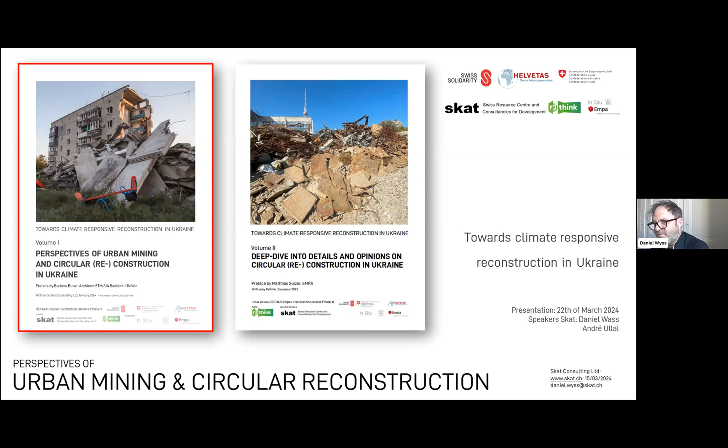While our part shows more the perspective of urban mining and circular construction.

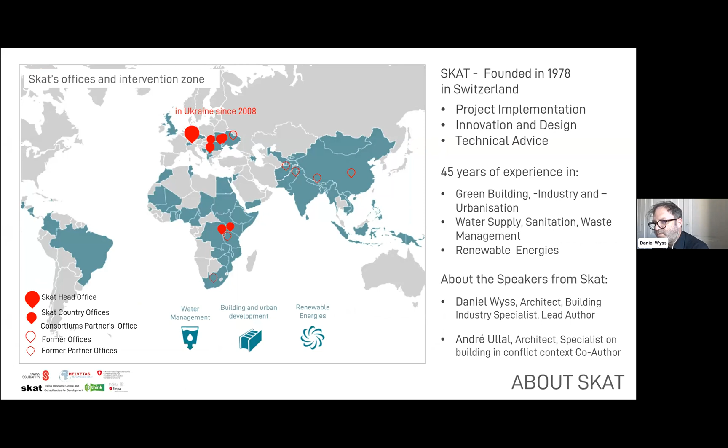So let me say a few words about Skat. Skat has been founded some 45 years back as a technical support unit for agencies like Helvetas, like the Swiss Cooperation, multilateral organizations like UN. And on the map, you can see where we are working. We have also our offices in different countries, many actually also in Eastern Europe.

We used to implement a project for SDC for nearly 15 years in Ukraine. It was called the DESPRO project, and ended just a few months before the war started.

So my name is Daniel Wyss, as I mentioned, and André Ullal, the co-author. He's also an architect and specialist in building in conflict context. He will give you the initial part of this presentation.

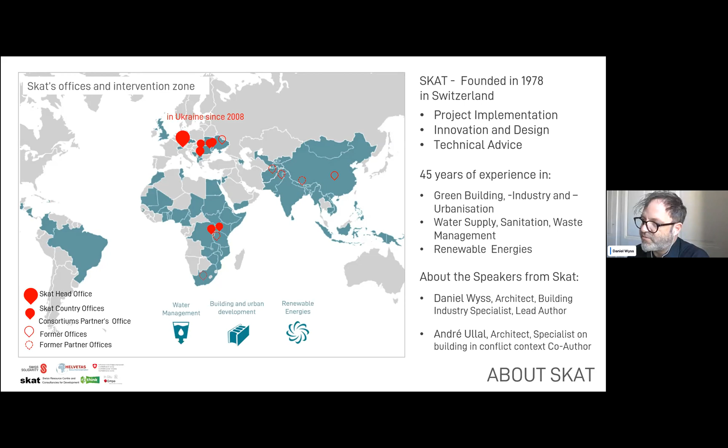Before we start, I'd like to quickly mention who is the target group of this study, of this report which we did. We are trying to inform the decision makers in this country and also abroad. It is also a document that is useful for homeowners who have actually a building or a house that is damaged, demolition firms, architects, engineers, builders and contractors, also those resellers of building material and the building material industry itself, and then of course also finance institutions.

We have worked also with external advisors. There are the Swiss pioneers in circular construction from In Situ. We have EMPA, the research institute from Zurich, Zero Waste in Kharkiv, and then research institutions like HSLU, for example.

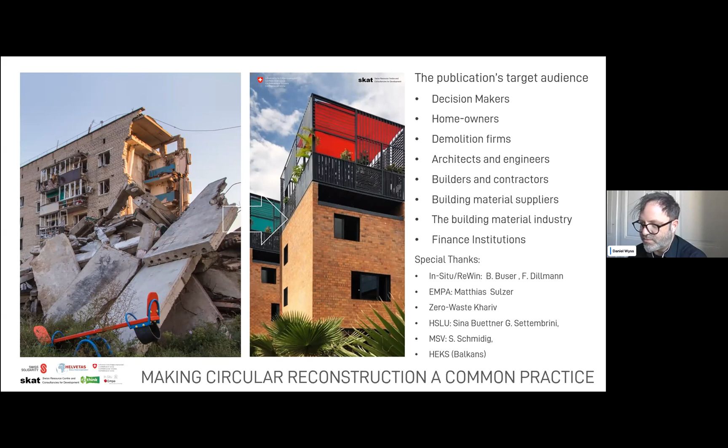Before we started this report, there was also this conference in Lugano, which was, I think, the first bigger event where the reconstruction, post-war reconstruction in Ukraine was discussed. And there have been quite important statements from your presidents, but also from EU and from the Swiss president about the importance of environmental aspects in the reconstruction effort for Ukraine. So I think we are well in line with the priorities of the key institutions and the representatives in the country and its environment.

So Andre, I would like to give you the floor for the part of the presentation, please.

Thanks, Daniel. Hello everyone. I'm just going to present a few slides which provide a very broad context for subsequent discussion by Daniel and then our partners at Rethink, who produced the second volume of the report. And I just want to start by talking a little bit about the extent of building destruction in Ukraine, something that I'm sure everyone here is all too familiar with.

The donut charts that you see on the bottom left there are from the rapid damage needs assessment, the latest assessment that was produced in February 2023 by the World Bank, the government of Ukraine, the EU and the UN, really providing an overview of the extent of damage.

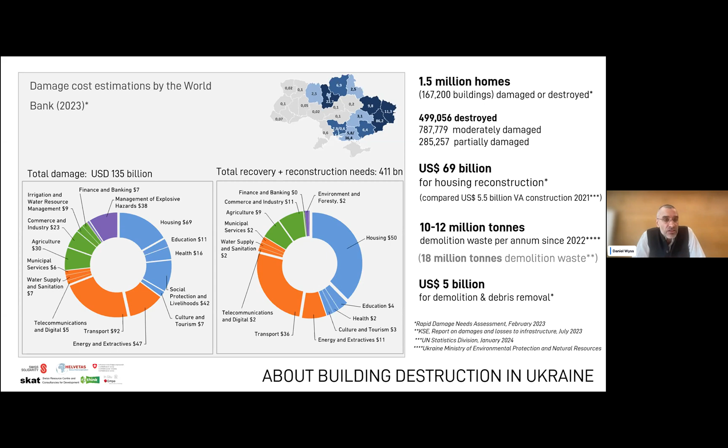So how do we deal with all of that building and demolition waste? There is a policy or legislative framework for doing so: the recently promulgated Resolution 1073 from the Ukrainian Cabinet of Ministers on the procedure for management of waste generated in connection with damage and destruction of buildings and structures. That provides an overall policy and legal framework for how construction demolition waste can be dealt with at the level of local government.

A couple of points relevant to us today: Resolution 1073 highlights recycling as an important principle and defines a list of materials from construction demolition waste that should be recycled, and different options for recycling. I know colleagues from Rethink will go into more detail, but Resolution 1073 also defines that local governments are responsible for approving demolitions and for setting waste management procedures, and also that the owners of buildings retain ownership of the waste.

Considering Ukraine's European pathway, the EU Waste Framework Directive of 2008 is relevant - published in 2008, amended in 2018, currently under revision. The 2008 version called for 70% of construction and demolition waste to be recycled. At the time, the average in Europe was around 40 to 50%. The overwhelming majority of countries in Europe have now achieved that 70% target.

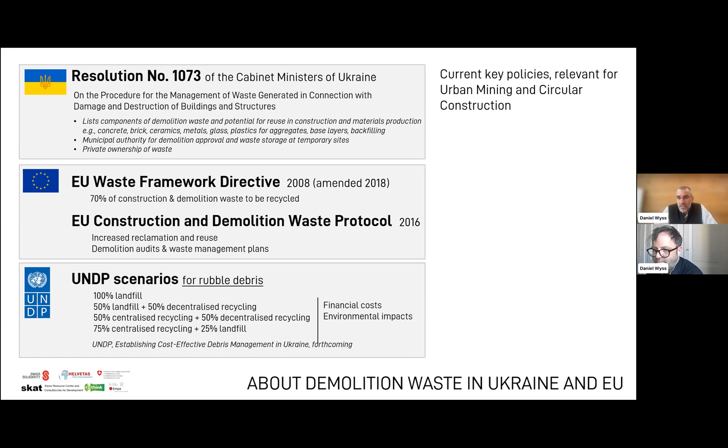Thanks. So one thing that UNDP hasn't considered in their current study is the option of reuse. Stepping back a bit, reuse is derived from the general principle of circular economy, which distinguishes itself from more conventional linear economy models characterized by extraction of materials, production, distribution and use of products, and then disposal of those products at end of life. In contrast, circular economy looks at intervening in that linear process and seeing to what extent materials, once they've reached end of life, can be recirculated back into the cycle.

So materials recycled back into production processes - recycling essentially involves downcycling and then reforming materials into new materials, or reusing, maintaining the form of materials and reusing them in their current form, often involving some level of repair. You can see refuse, rethink, reduce, reuse - ultimately we all understand this circular economy principle of trying to maximize the value of existing products rather than treating them as waste.

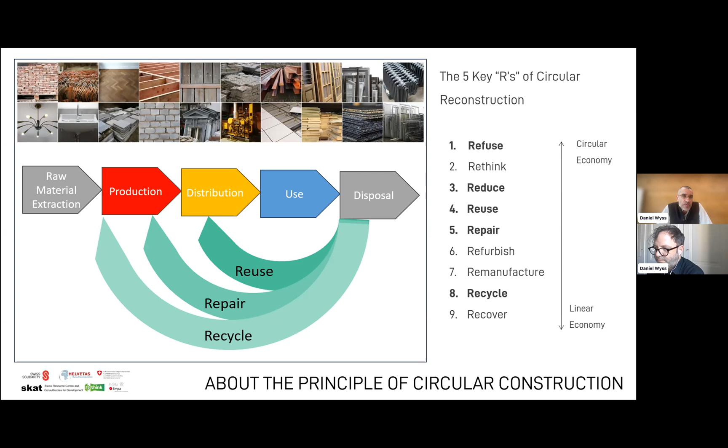I think Daniel will discuss in a bit more detail the potential for the different types of materials in Ukraine. Could you go to the next slide, please, Daniel?

Finally, I just wanted to end with a few slides of building projects that illustrate the potential of reuse. I'm just going to flick through them quickly, but look, up until recently, reuse of materials has really been restricted to finishes - either internal finishes of buildings, skins or cladding, and internal finishes like tiles, and fit-out materials like sanitary ware. But increasingly, reuse is expanding to include structural materials and materials integral to the building envelope.

So the project you're seeing here is quite a prominent example in Switzerland. It's the K118 building by In Situ, Baubüro In Situ Architects, based in Winterthur in Switzerland. It's in an old industrial complex. The building uses reused components, structural steel - so it reuses structural steel.

Most, if not all, of the building envelope is fabricated from reused materials. That's including the cladding, the orange cladding you can see in the image, the windows, all of the secondary structure inside, and the insulation. And of course, as with many buildings using reuse, the overwhelming majority of the internal finishes are from reused products.

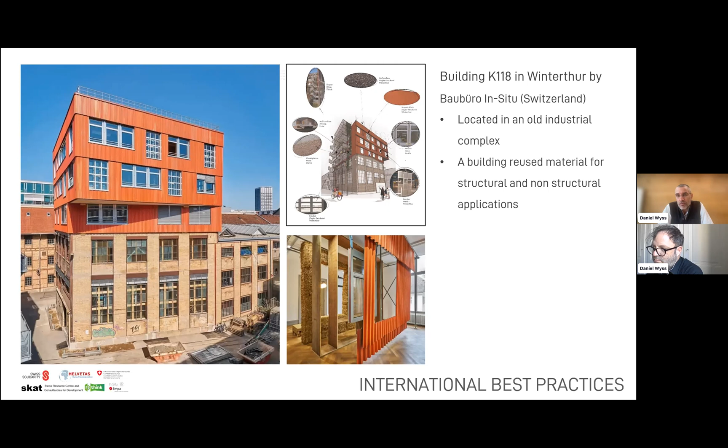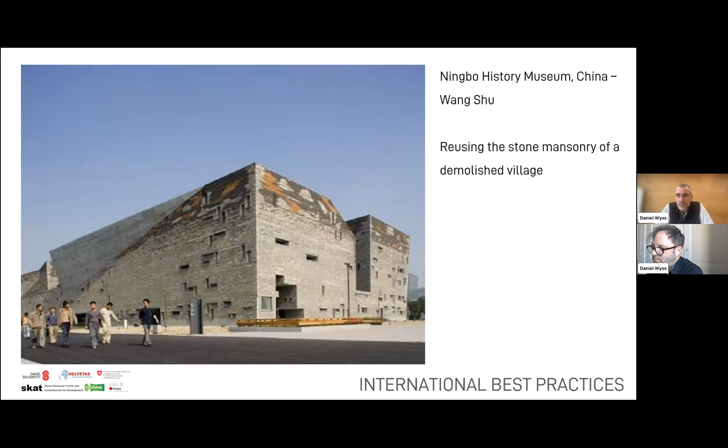Daniel, can you flick forward, please? Some others, we'll just flick quickly through these - these are really just to illustrate that building materials can be reused in both structural and non-structural applications. There's a range of different possibilities here, both from mundane or commonplace buildings, but also more architecturally sophisticated examples. Here we have the Ningbo History Museum in China by recent Pritzker Prize winner Wang Shu.

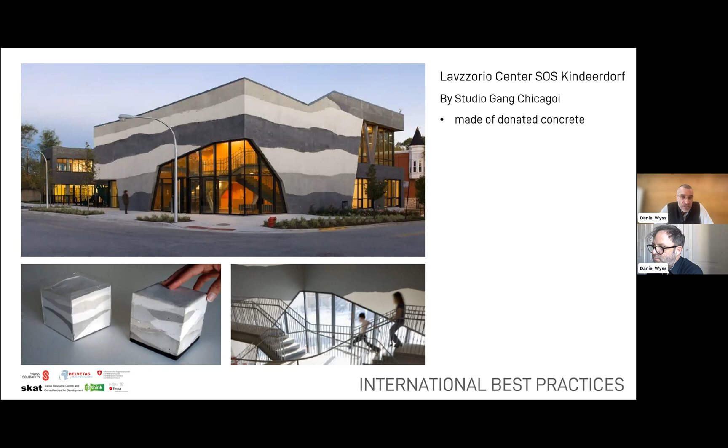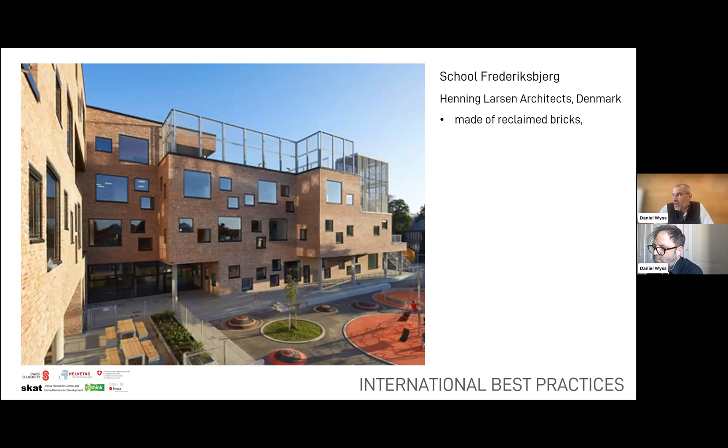That's it, Daniel. I'll hand it back over to you for urban mining.

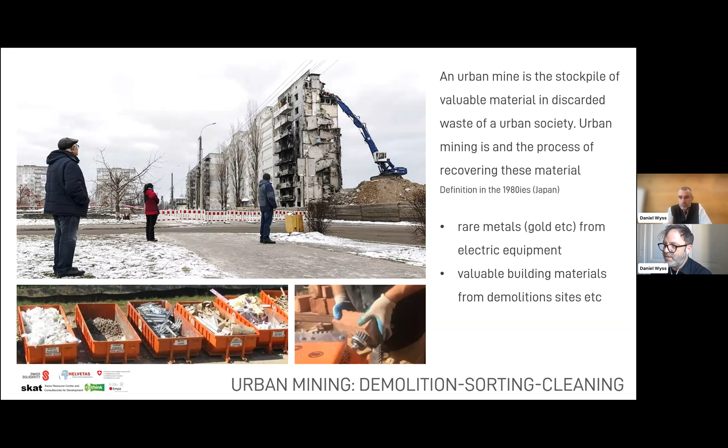There are different types of materials - some are easy to use or already used for a long time, for generations. Others are more complex. Normally a material that can be carried by hand, easily transported, like windows, sinks, toilet seats, and so on - these are rather low-hanging fruits for urban mining, while others, like insulation material, require more processing.

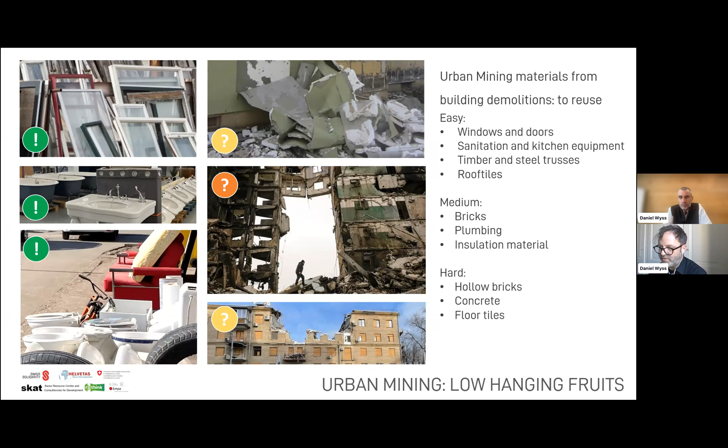These are the huge damages we have among the Khrushchevka buildings in your country.

Of course, there is already a long tradition of reusing material, urban mining, even if you didn't call it like this. These are pictures I took from Ukraine and the surrounding environment.

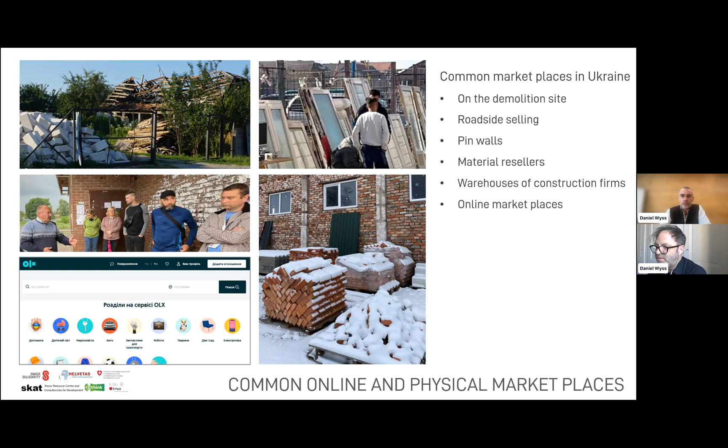So after the war, this is how people actually sell or make their materials available. Sometimes it's on the plot, sometimes along the road. Some use pin walls to inform the village people that they have something to sell, or resellers availing used materials in their exhibition yards.

Or there are, of course, the online marketplaces. We have this also in other countries in Europe, in Switzerland as well. But more and more, specialized shops are also coming up.

We call them Bauteilbörsen. It's quite popular in Germany nowadays. These are like supermarkets or warehouses, outlets where you can find lots of material, from transportable sinks to more complex structural elements like stairs. Some are specialized for antique building material or for bricks, and of course the scrap steel traders, which have always existed, I think, since the Industrial Revolution.

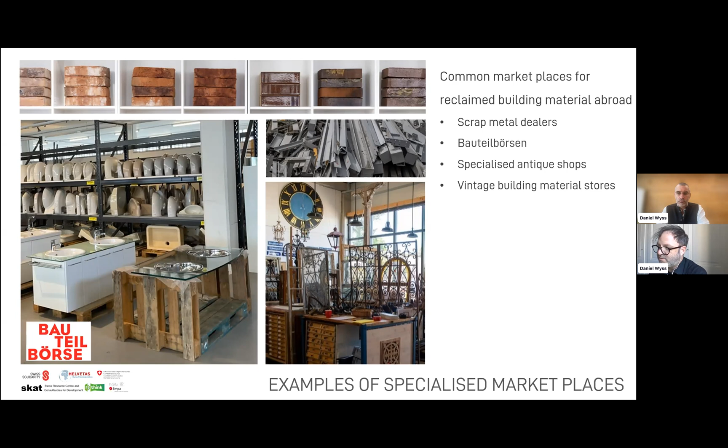In terms of online marketplaces, we have also those well-known ones for all types of items. However, for architects, quite often the information available on those marketplaces is insufficient for proper planning. That's why a couple of online marketplaces have been developed specifically for building materials. They allow you to describe an item in more detail, put more precise measures, and filter among the material, which is particularly useful for planners who want to integrate used material into their design.

We also have maps of demolition sites. So if an interesting object is being demolished, it can be useful to go there and check what might be available.

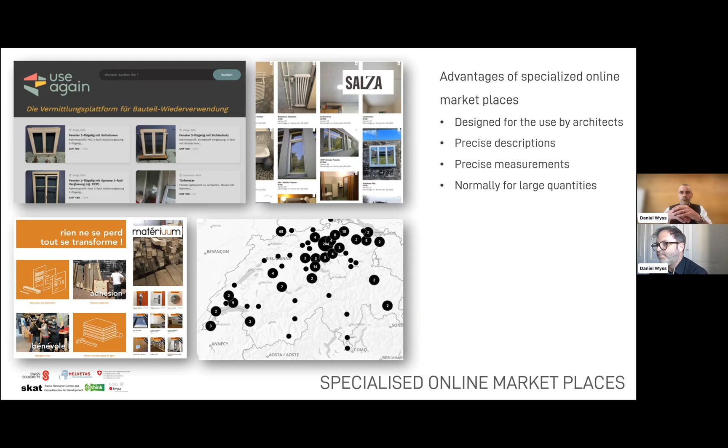We have in various places what we call circular construction yards. These are places where reusable building material is stocked or bulked. Quite often the quantity is an important element for reuse—if you only have a few items, you cannot really integrate them into a proper building. But as soon as you have enough quantity available, it gets interesting, and this is exactly the purpose of these circular construction yards.

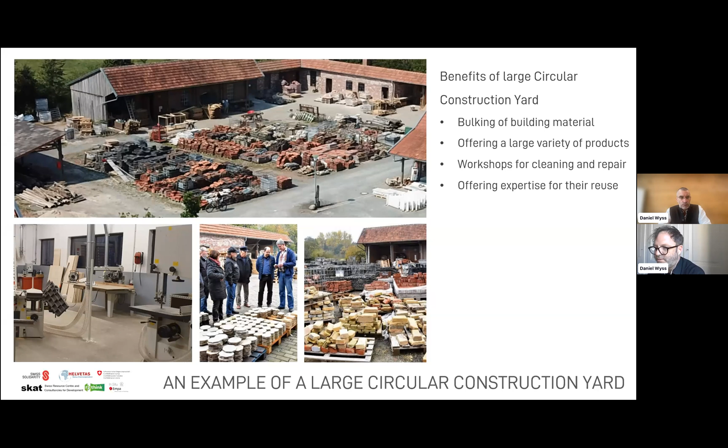Quite often you have experts there who can advise you how to use the material, or they clean or repair items that can be easily repaired.

Helvetas has done the same thing on a village scale in Rus'ka Losova in Ukraine. I had the pleasure of following this part of the project and offering some advice. It's the same thing on a smaller scale—you can see we have been bulking bricks here.

We tested their qualities, and then there was this tent with more mobile items, also those which need protection from the weather, obviously. There were also a couple of demonstration walls we built to show how one can reuse these bricks, or insulation material, to create well-insulated, load-bearing structures.

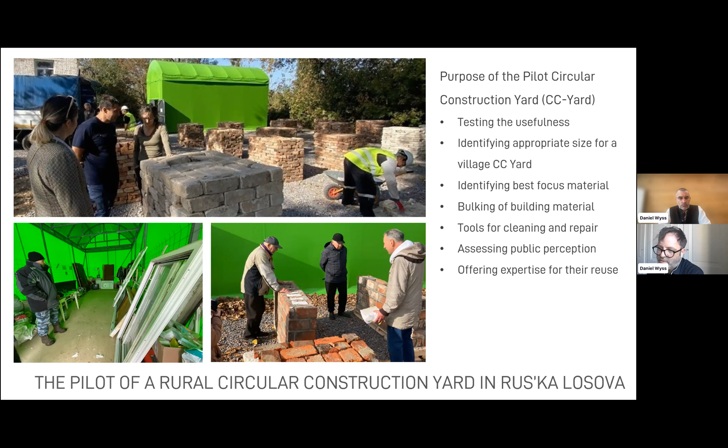However, the question remains: what happens with the larger items, those heavy concrete panels, for example, from the Khrushchevka buildings? Here the problem is that the demolition requires heavy equipment, and the testing of the quality of the damage—whether it's from fire or shock from an explosion—needs to be assessed.

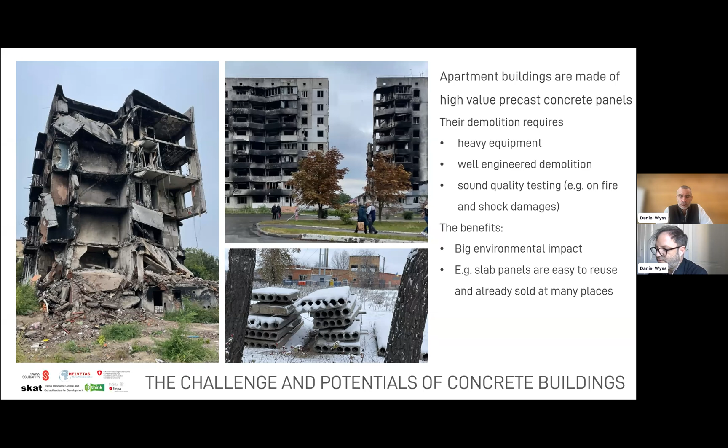I think this is still a challenge that will have to be looked at closely with research centers and a network of specialists. What we can already see is that the concrete panels for the slabs are already being sold or made available for reuse on several sites.

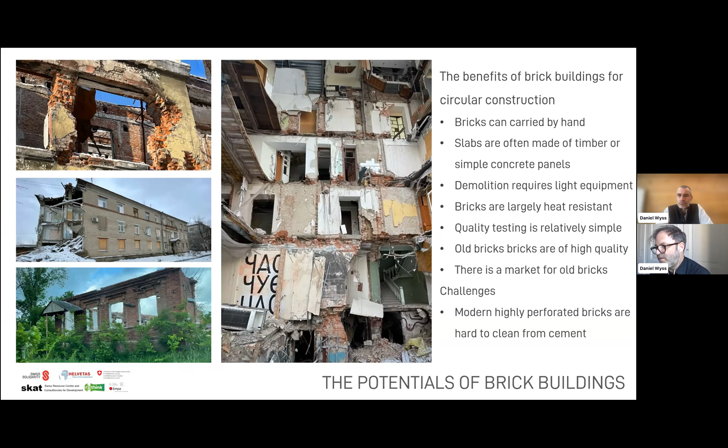There are also lots of brick buildings in Ukraine. We see that they are being demolished even more rapidly now because it's easier to do that—you don't need as much equipment, and quite often the interior load-bearing structures like the slabs are made of timber or lighter material, which eases the job for demolition and reuse.

We have also seen buildings that I followed over these two years. This one here was heavily hit, and it was declared non-repairable at the beginning. But when I came back, they had analyzed it and saw that the shocks were well absorbed—there was no heavy structural damage, so they are repairing it now, again with bricks of the same type.

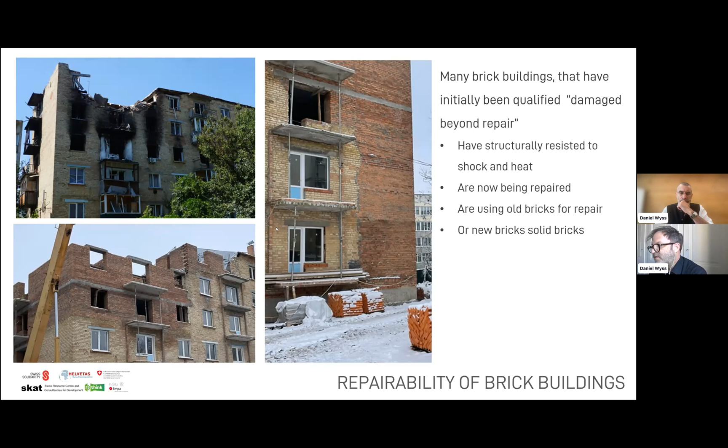Now, as Andre mentioned, there is a big need for additional construction capacity, whether in building material production or construction itself. So we will look at the next part of the presentation into the industry—how in other countries the construction industry has integrated the principle of circular construction, who are the pioneers, and what technologies are being used.

Quite often, the common practice in many countries is still that building waste is crushed into small stones or crush, whether bricks or concrete, and then reused, for example, for roads.

You can also reuse it for concrete, recycled concrete, or with bricks. It's quite popular as outdoor material. We have seen in damaged buildings that they used crushed bricks in the past for traditional concrete, and lightweight concrete slabs, which is still a possibility today.

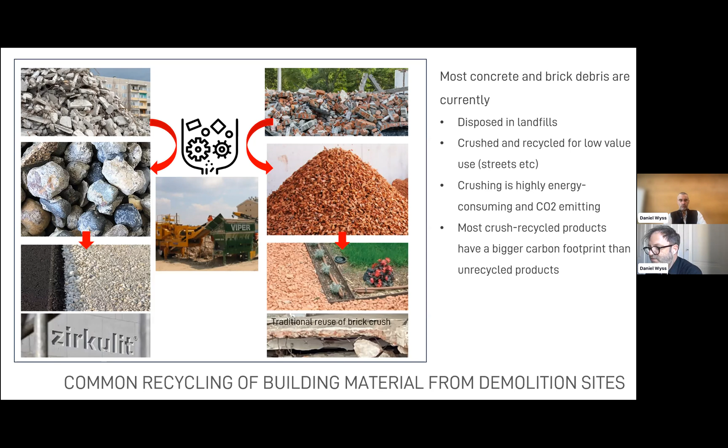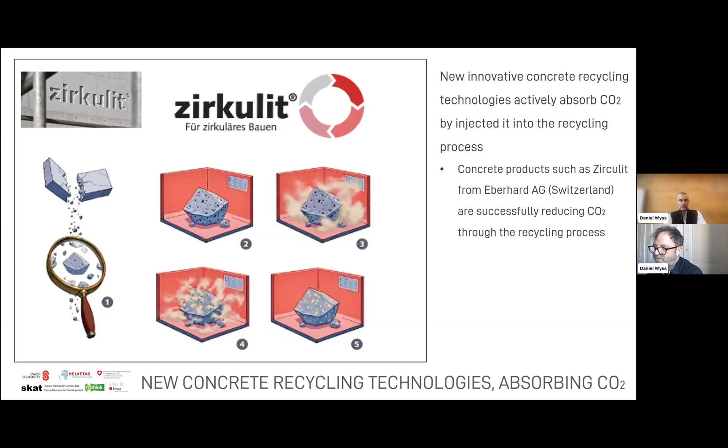However, crushing is a very cost and energy intensive process, so very often these recycled materials have actually a bigger CO2 carbon footprint than new material. So the environmental benefit of crushing this material is not that great. There are now a few companies who have started injecting CO2 into this recycling process, which allows finally recycled concrete with a positive environmental benefit.

And then, of course, reclaiming the concrete panels is by far the best way to reuse them, as I mentioned earlier.

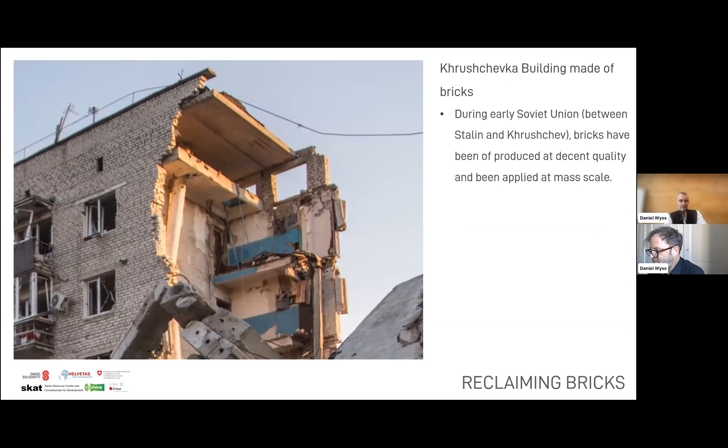Now let us look a little closer at the reclaiming of bricks. There are, as you know, lots of brick buildings in Ukraine, particularly in the Kiev and Kharkiv area. There have been hundreds, if not thousands, of brickyards operated in the past. Now there are newer brick factories with newer products. However, the quality of these bricks is quite good, particularly the very old ones, the Tsarska Tsegla, or pre-revolution bricks. They are very, very strong, with very low water absorption, so they are excellent for reuse.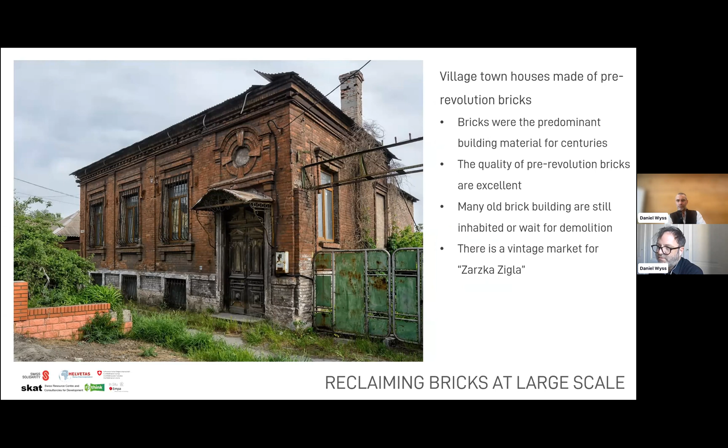And there are methods to do that in a very effective way. I know there is a traditional way to do it already existing for decades or centuries in Ukraine. However, now for doing it on a mass scale, I would like to share with you some pictures of how it is done, particularly in Northern Europe, in Scandinavia, also in Australia and the United States, where the reuse of brick is actually an industry of its own.

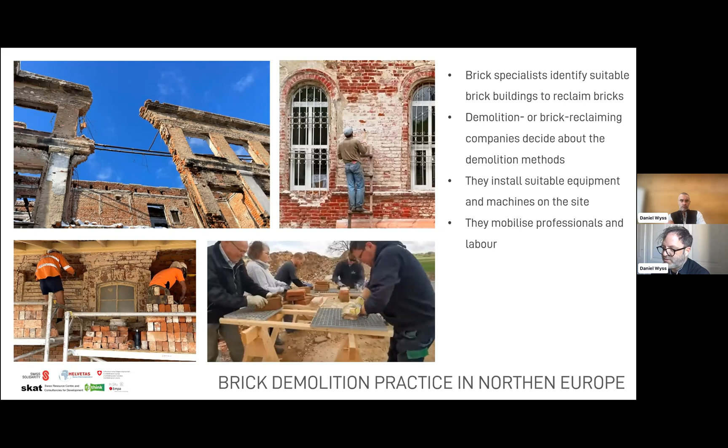You can see here they are carefully removing the bricks during demolition. There are people doing first cleaning on the construction site itself, and at this moment they also sort the good from the bad bricks, those which can be reused directly or which need further cleaning. There are also machines available you can put next to the construction site to trim the bricks if they have, for example, mortar that sticks too much to the product.

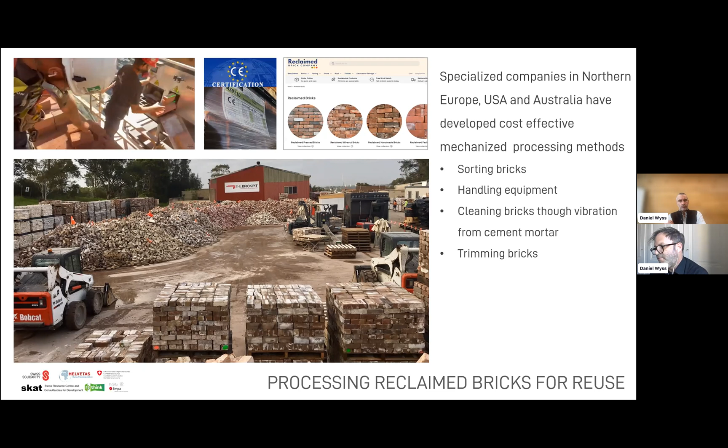So these are examples of companies. I think the bigger picture is from Australia, a brick reclaiming company, and you can buy the products online, or get them there. They are in Denmark, certifying them with EU certification. So in terms of quality, if a brick goes through that process, it is actually as strong and certifiable as any new modern brick.

So the industry is trying to go to larger scale now. We can already find quite big factories in the US, but also the biggest brick producer in the world, Wienerberger, is currently working on equipment together with a Danish company for robotized and really large scale processing of reclaimed bricks.

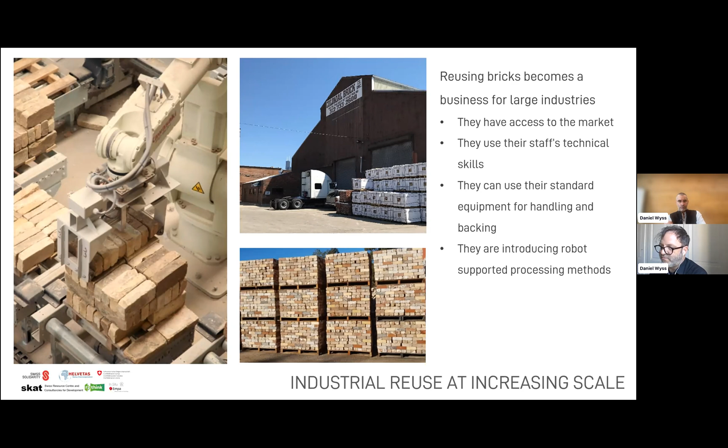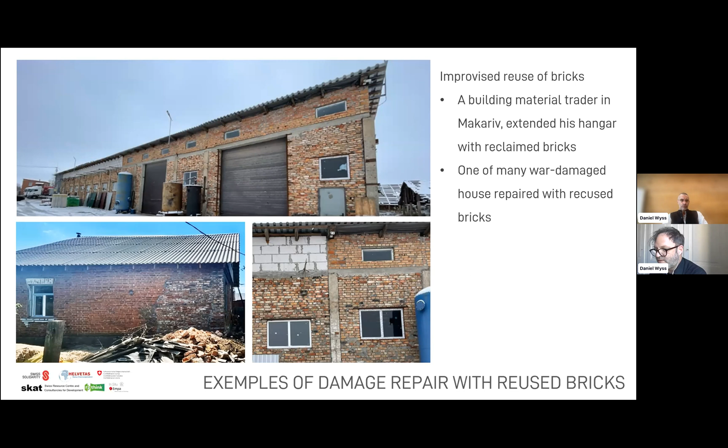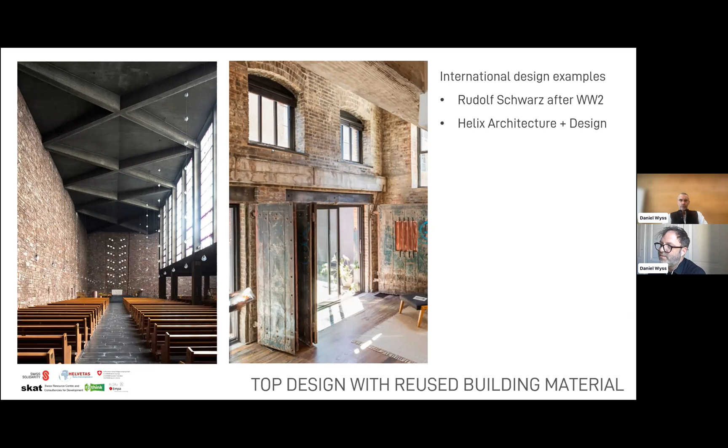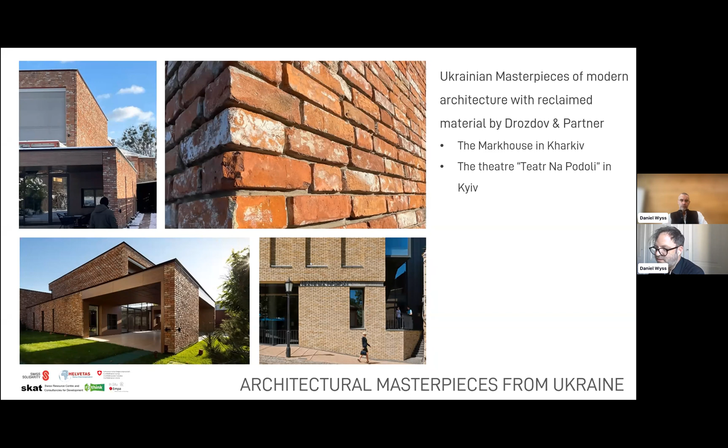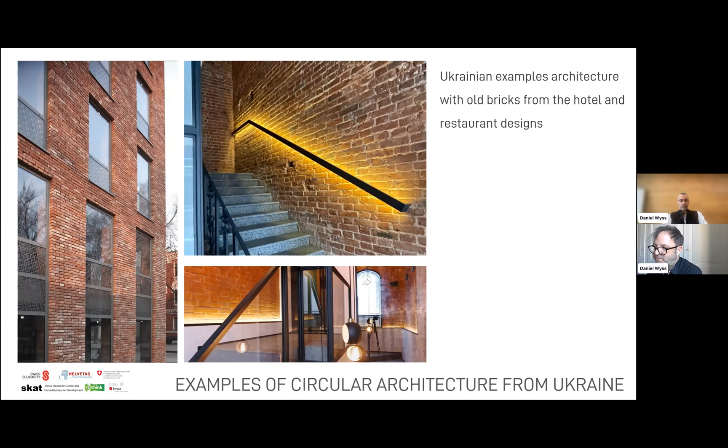And then you might also know the theater in Kyiv that was done with the same architect with this material. You can also see lots of hotels now using reused building material as a key feature for the interior design, also for marketing if you go on their website. And then, of course, plenty of restaurants doing the same.

Helvetas also asked us, okay, what could be the way forward now after what we have analyzed, what we have seen in the field, after the potential which we have observed and assessed. The question was: we have done this circular construction yard for the village Ruska Lozova. Would there be a possibility to grow or learn something from that experience and do a next step? So our suggestion, or the finding of our analysis, was that for a village context with lots of damaged houses or damaged brick houses, this is probably the right size which could actually be replicated in many villages.

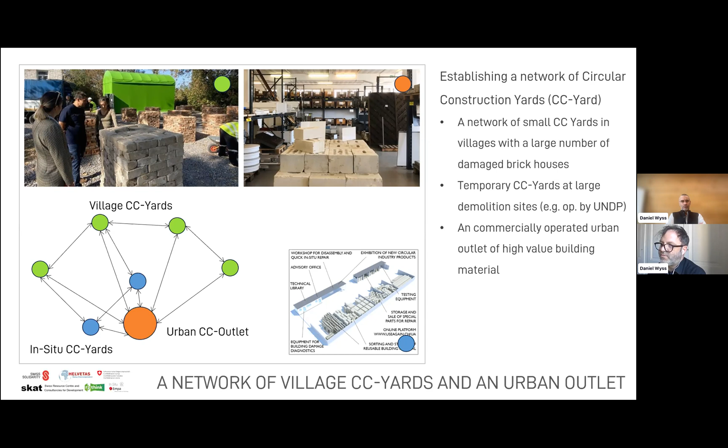So it is very low cost. It doesn't require a permanent presence. It is a place where you collect material and re-avail it, either commercially or free of cost, as is currently the case for certain materials. You can connect it to construction yards specifically related to a demolition site, where you sort the different materials and try to re-inject them into the construction supply chain. Then an important element could be an urban outlet where the best material, the one with the highest value, is availed for urban clients, and these can achieve quite high prices, as we can see from existing building material resellers. So a triangle between the green, blue and orange dots here will probably allow this to grow and optimize the reuse of reclaimed material.

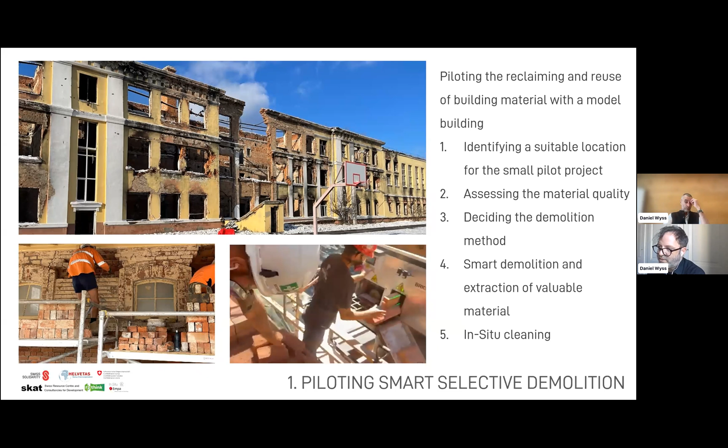The second question we've been asked to look at is how to continue with demolition and building, demolishing damaged buildings in a smart way, and then rebuilding with the same material. Here we have a couple of steps which we imagine would be useful to start rather soon. The first step is certainly to identify a suitable building that allows relatively easy demolition and reclaiming of the bricks at a high quality level. We have seen there are many of them. I think it's good to have a well-located place where people can see how this works in practice, and then to implement it, to find out what is the most cost-effective and safest way to demolish such a building.

Then this material needs to be tested. I think there is a need for protocols to certify the quality of these products. We can already use examples and protocols that exist out there. Based on this, we can also design new ways to use that material in order to meet the environmental and structural standards of today. There are experiences out there - we have done this in the Balkans already to a certain degree, and there are others with similar experiences.

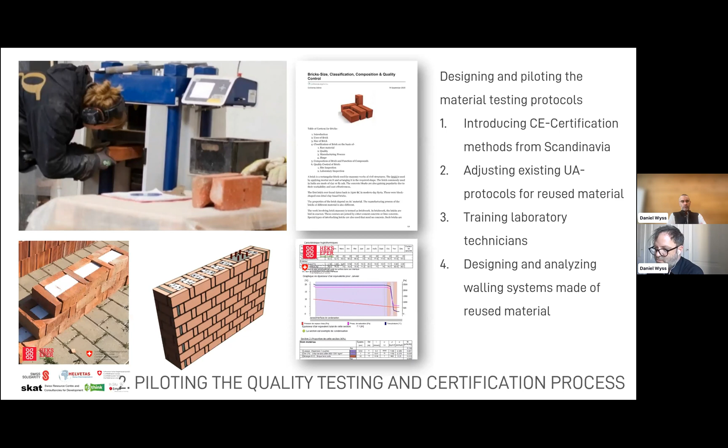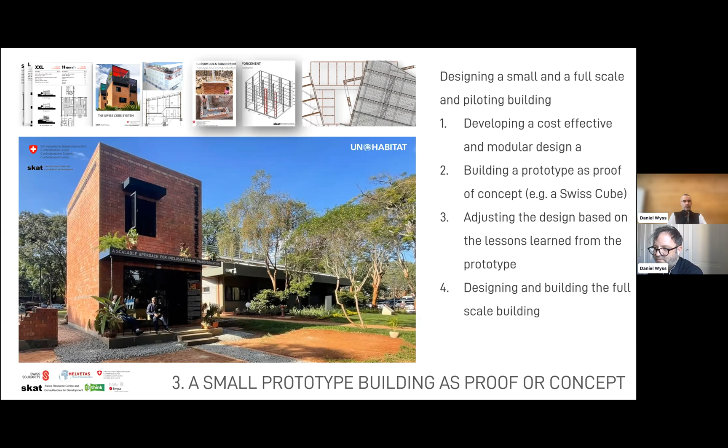The third step, which I think is very important, is to start very rapidly with a real building - a complete building, not a complex, but a simple one that allows us to show the quality one can achieve with it. We did that in different contexts already in the past. What you see here is a model building at the UN Habitat headquarters, which we just inaugurated last summer, which had this walling system you've seen before, which can be filled with waste insulation material as well, but there can be plenty of other designs too. It's important to show the performance, to measure it, and also to see the architectural quality you can get with this special surface of reused material.

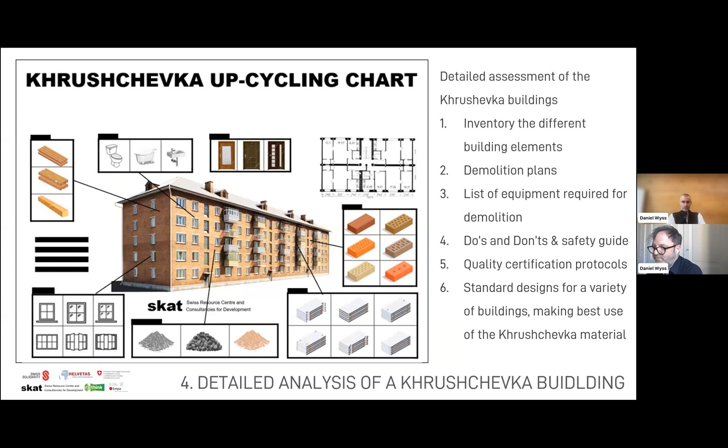The one thing that would certainly make sense in the context of Ukraine is looking closer at these standardized buildings, particularly the Khrushchevka buildings, whether made of bricks or concrete, to do the inventory, to check how much material is there, how to demolish or dismantle it so it can be reused best, and then also to think about what can ideally be built with it. Because you have these same buildings thousands of times, I think this is not only useful for post-war reconstruction, but also for the future once these buildings need to be replaced or upgraded.

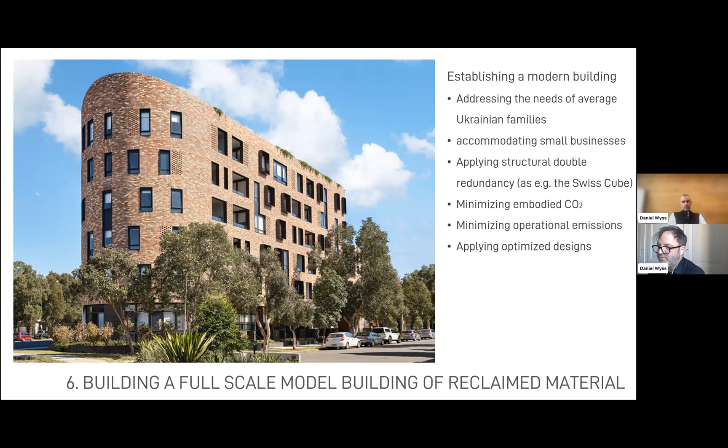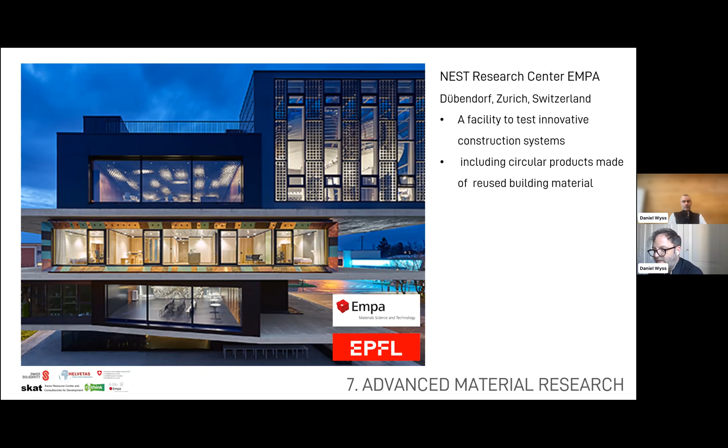As a last step, there will be research required to see the long-term, mid-term performance of reused material, and there are institutions that have already expressed lots of interest in doing that. One is EMPA, the Nest building, which is designed to test a variety of different construction systems on an accelerated long-term simulation. So one could also try, for example, the upcycled Khrushchevka panels or any other material in such a facility.